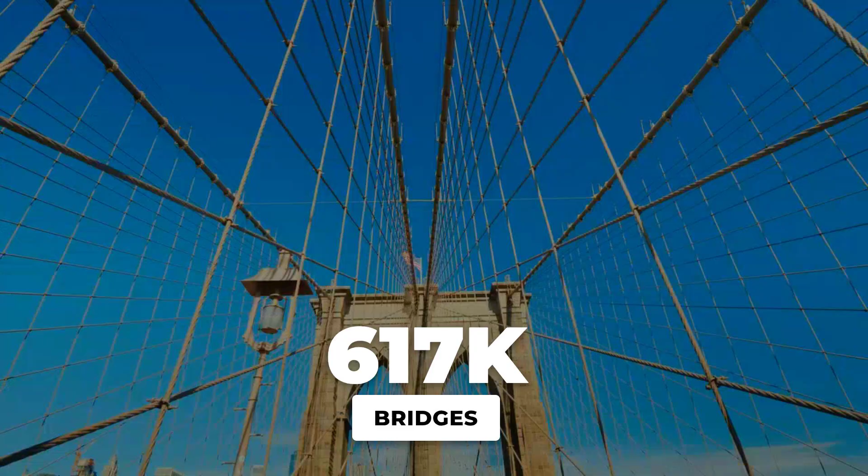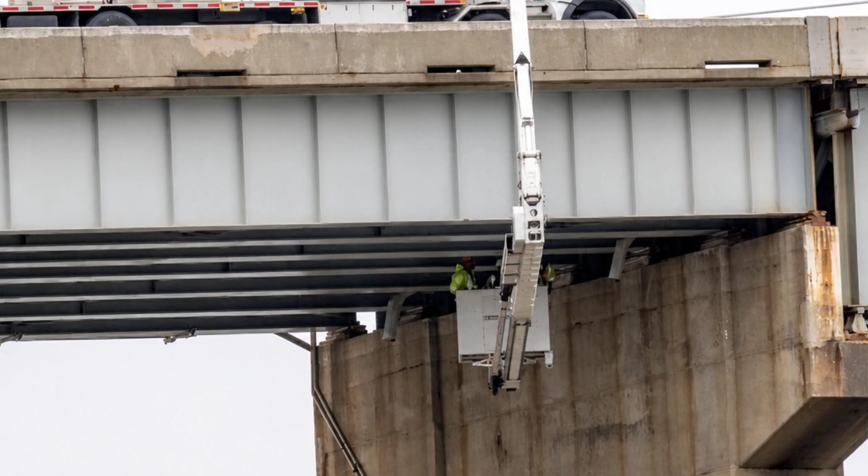Every day, 178 million trips cross bridges the federal government classifies as structurally deficient, not sound enough to pass, yet still open to full traffic. The American Society of Civil Engineers scored the nation's bridges a D+, a grade that has barely moved in years. Behind it, 617,000 aging structures, a repair backlog exceeding $100 billion, and a crisis hiding behind every American commute. The distance between what engineers know about these bridges and what you've ever been told is where this story begins.

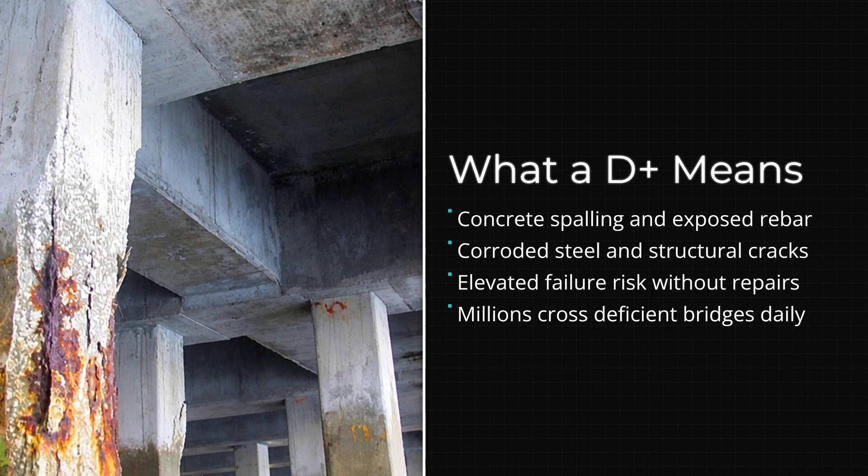Every 4 years, the American Society of Civil Engineers releases a National Infrastructure Report Card. This system translates thousands of pages of highly technical data into a single, understandable grade for taxpayers and policymakers. Since 2017, America's bridges have held a D+ grade. A D+ grade indicates that a significant portion of these structures are in poor condition, showing advanced deterioration and operating with a heightened risk of failure.

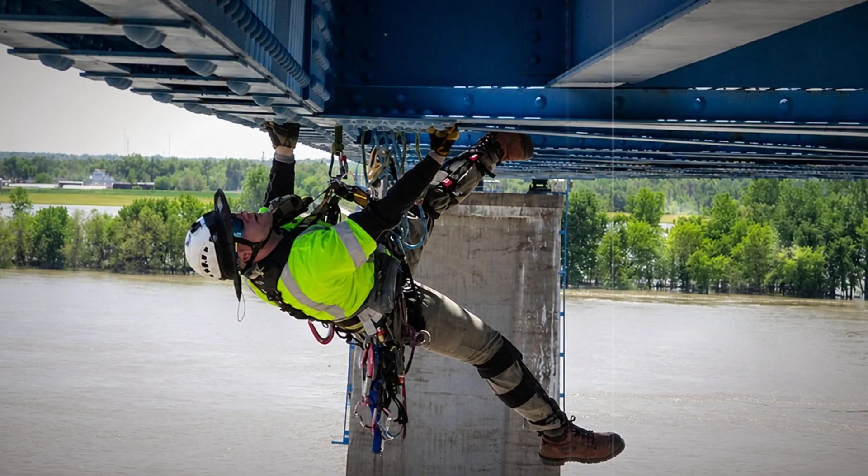When the Society issued its report card, other public systems showed progress. Public transit, drinking water, and energy systems clawed their way upward, lifting the nation's overall infrastructure grade to a C- in 2021. Yet, the grade for bridges remained completely stagnant. They did not budge from the D range. This stubborn score shows that while other public assets slowly recover, the concrete and steel carrying millions of vehicles daily are left behind.

Spread across the United States is a massive network of roughly 617,000 bridges. As of 2022, federal records classified about 42,000 of these structures as structurally deficient. This designation means that at least one key load-bearing component, such as the deck or the concrete support piers underneath, has degraded to a poor state. Rather than being isolated to a few remote areas, this structural wear is distributed throughout the entire national transit system. Statistically, 1 in 3 American bridges now requires significant repair or complete replacement.

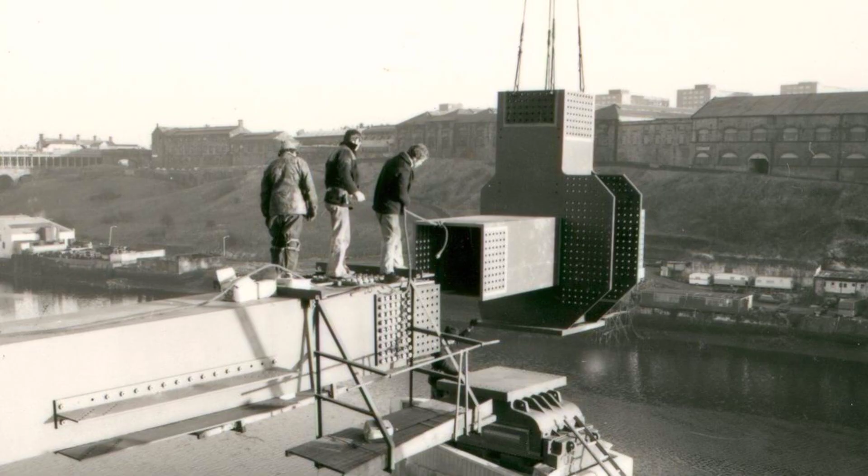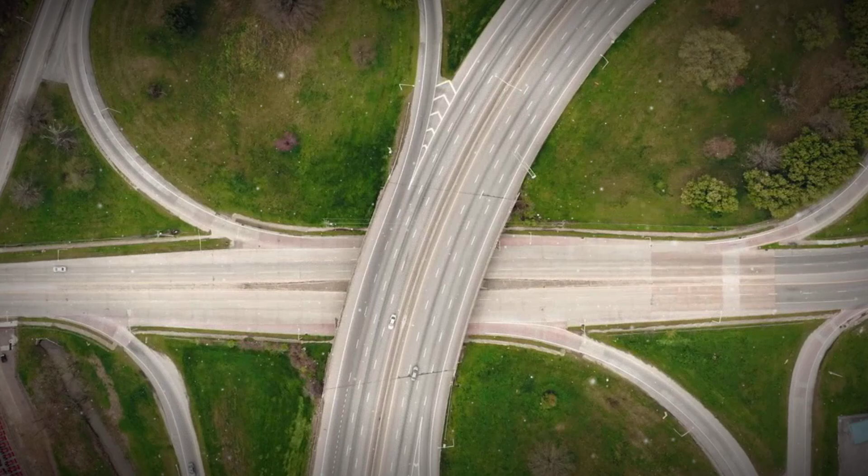Many of these spans are aging simultaneously. The average bridge in the national inventory is 44 years old, meaning a large portion of the network was built decades ago to handle much lighter traffic than it carries today. This deterioration directly affects daily life. For a parent driving children to school or a commuter heading to work, these statistics materialize as the concrete overpasses and river crossings they cross twice a day. The wear is silent, ongoing, and embedded in the daily routines of millions of people who assume the pavement beneath them is sound.

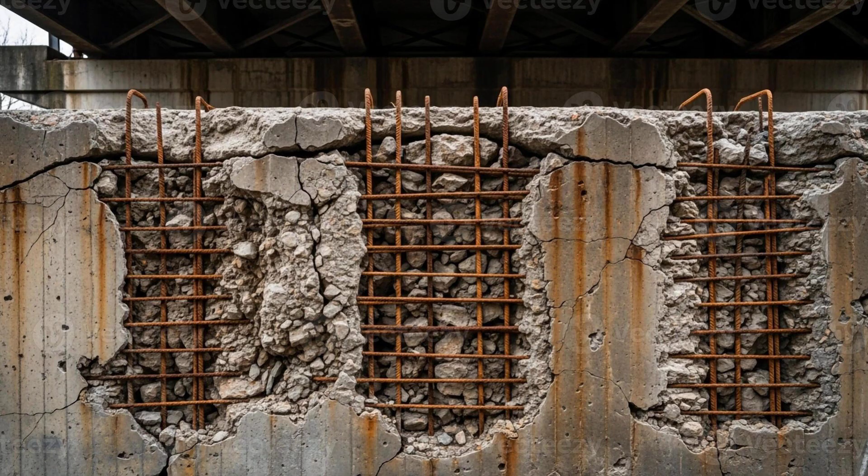To evaluate bridge safety, the Federal Highway Administration relies on a strict 0 to 9 condition scale. National standards require inspectors to assess 4 primary areas: the deck, which supports the actual roadway; the superstructure, which bears the immediate weight of the traffic; the substructure, consisting of the piers and abutments that anchor the bridge; and any culverts running underneath. If an inspector rates any single one of these major components as a 4 or lower, the entire bridge receives the federal classification of structurally deficient. A rating of 4 indicates that the component is in poor condition, showing advanced decay, cracking, or material loss.

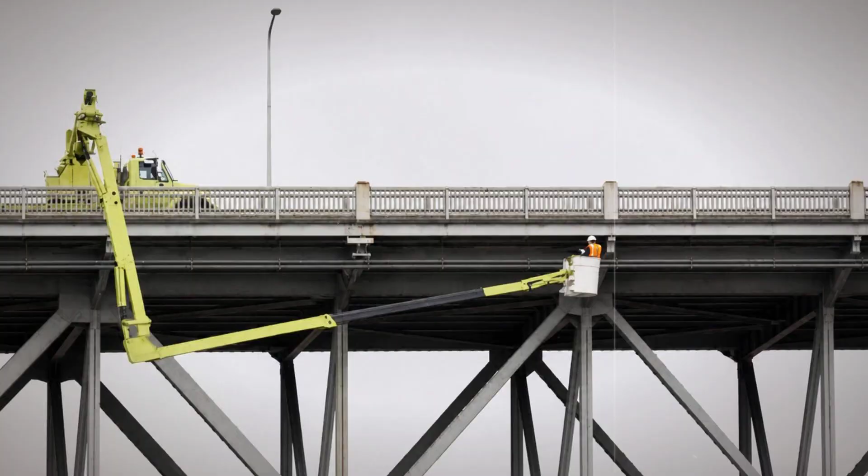This classification does not mean a bridge is in danger of immediate collapse. Instead, it serves as an early warning, indicating that an essential load-bearing element needs rehabilitation or replacement. While waiting for these repairs, federal rules allow these deficient bridges to remain legally open to full traffic. This operational status keeps the aging network integrated into daily routines. Every day in America, commuters, school buses, and commercial trucks make roughly 178 million trips across these structurally deficient bridges. These drivers move at highway speeds, completely unaware of the degraded support systems resting just feet below the pavement.

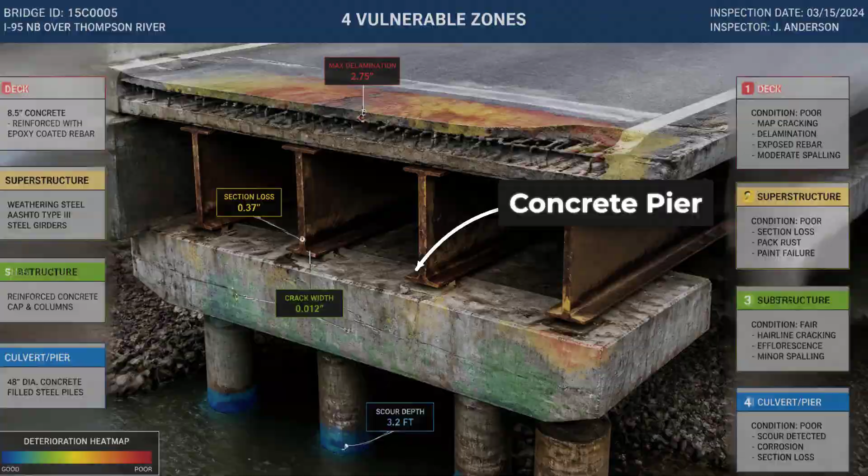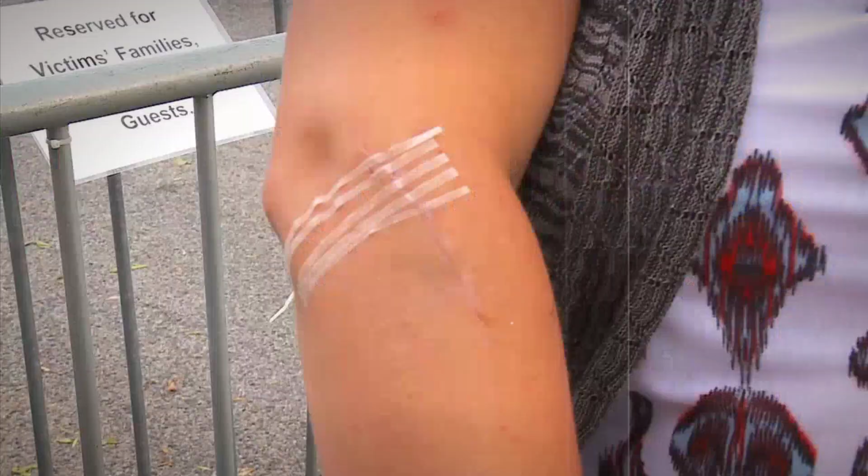On August 1st, 2007, during the evening rush hour, the 8-lane steel truss I-35W bridge in Minneapolis suddenly fractured and plunged into the Mississippi River. The disaster killed 13 people and injured 145 others. At the moment of the failure, the span was carrying part of its daily load of 140,000 vehicles, alongside heavy construction equipment parked on the deck for resurfacing work.

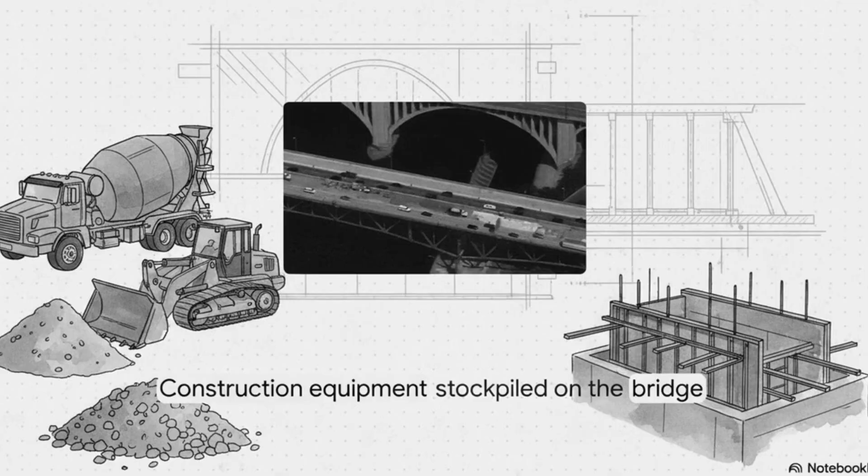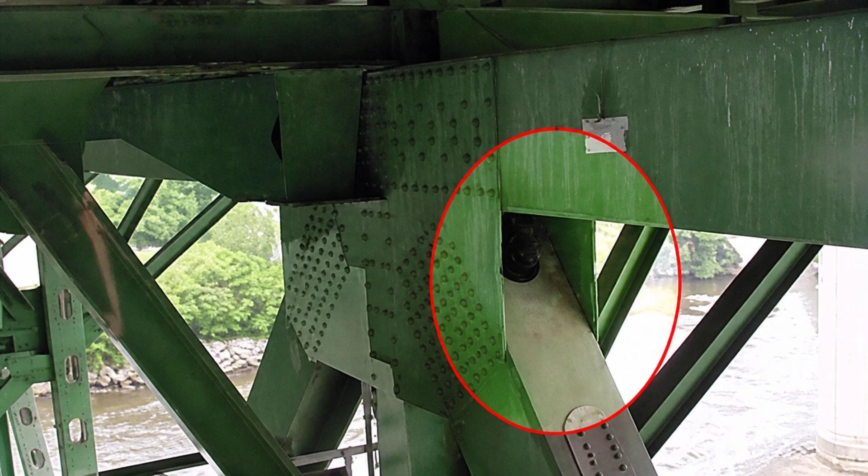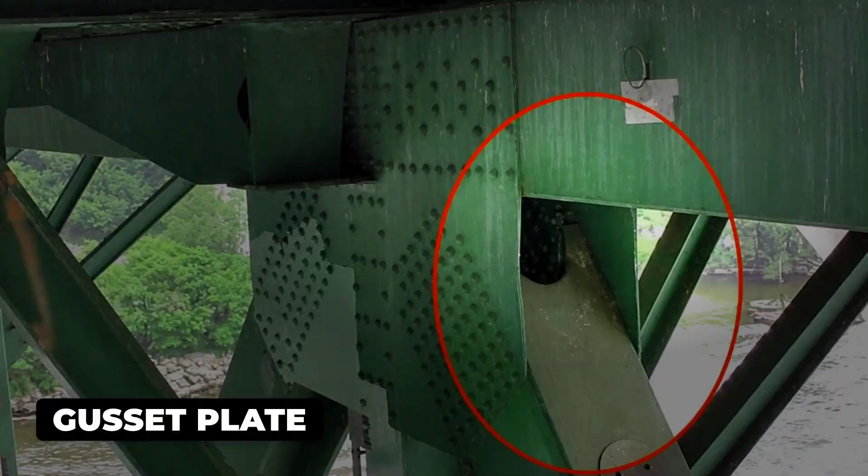For 17 years leading up to the disaster, the National Bridge Inventory had classified the I-35W bridge as structurally deficient. Its superstructure score fell to a 4 in 1990, yet the physical failure originated from an error made 40 years earlier during construction. Investigators from the National Transportation Safety Board discovered that the bridge's steel gusset plates, which joined the massive truss members together, were designed too thin. At just half the required thickness, these undersized plates from 1967 held the structure together until the cumulative weight of traffic, concrete modifications, and construction materials ultimately caused them to buckle.

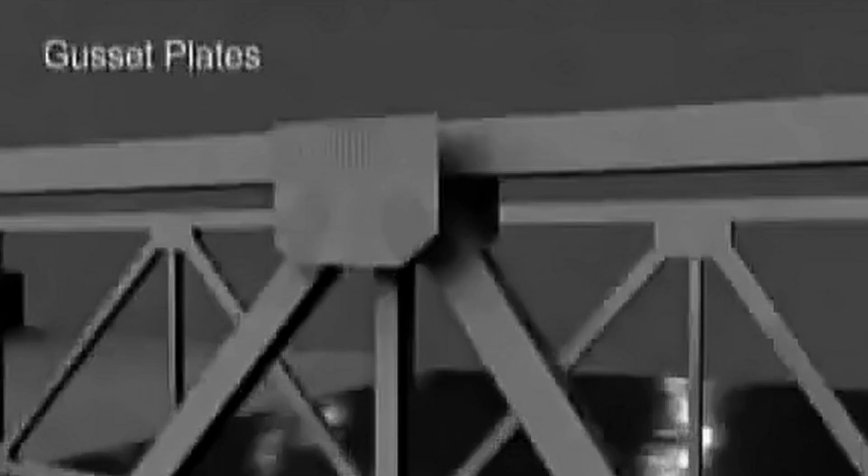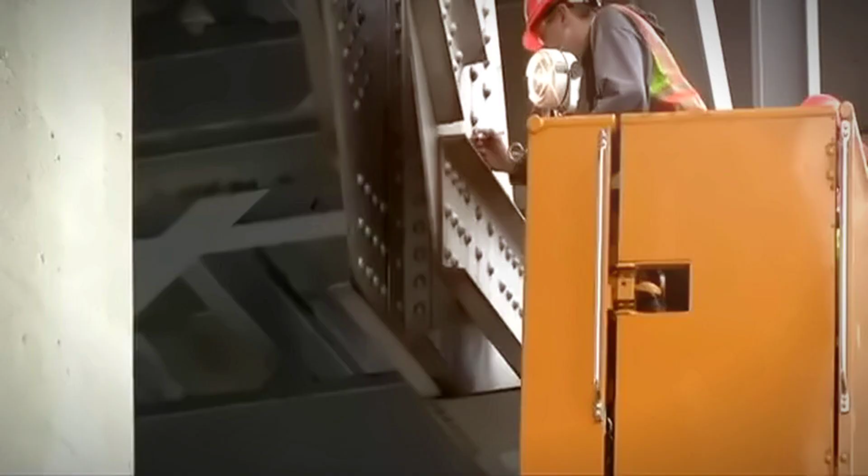The Minneapolis disaster proved that structural deficiency classifications warned of real, physical dangers. It forced the first serious nationwide bridge safety conversation in decades, forcing state and federal agencies to reevaluate how they assessed the load capacity of non-redundant steel bridges across the country.

Before dawn on March 26, 2024, a container ship lost power and struck a primary support pier of the Francis Scott Key Bridge in Baltimore. The collision triggered a catastrophic chain reaction, causing the entire continuous steel truss span to collapse into the Patapsco River within seconds. 6 construction workers who were repairing the roadway at the time were killed.

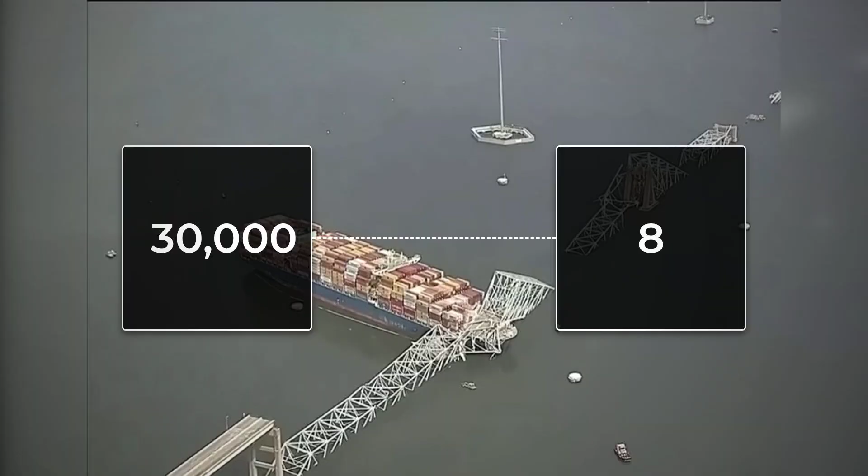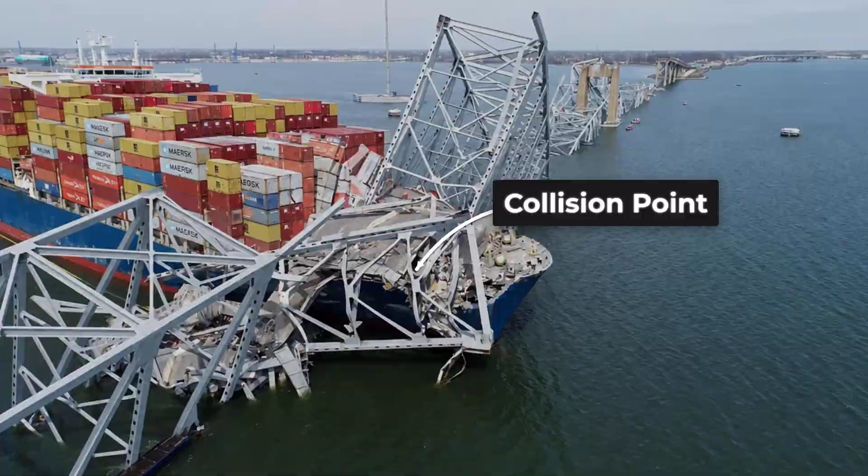The disaster instantly severed an essential freight artery in the Northeast. Prior to the collapse, the bridge carried 30,000 vehicles every day. With the crossing destroyed and the port of Baltimore blocked, regional shipping networks were thrown into chaos. Rerouting freight and commercial trucks around the harbor cost the economy an estimated $15 million per day.

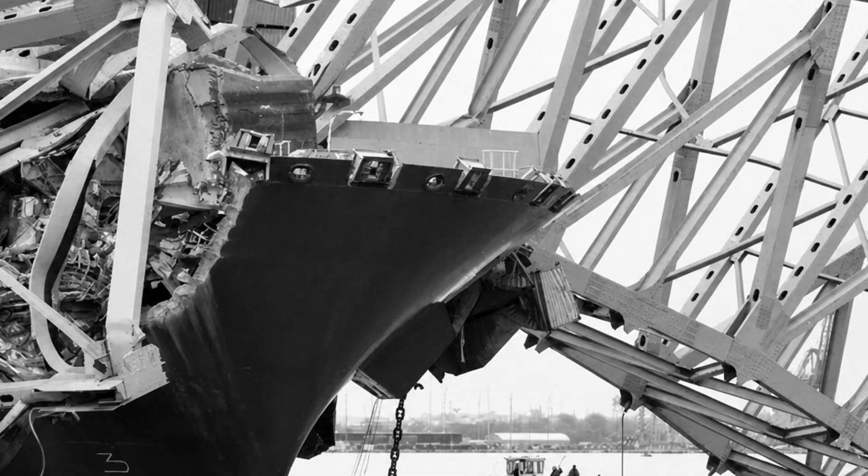While the destruction resulted from an external collision rather than structural decay, the immediate fallout demonstrated the extreme fragility of the nation's supply chains. The event temporarily reignited congressional debates on infrastructure protection, but the political momentum quickly stalled, producing no new federal legislation.

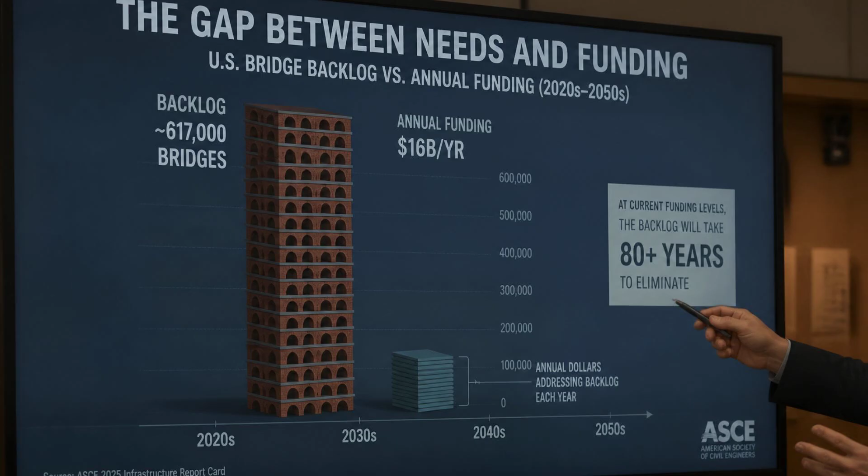The federal government estimates that clearing the backlog of structurally deficient bridges requires $125 billion. Yet normal federal funding across all programs averages only $16 billion per year. At this pace, clearing the existing backlog would take decades, even if no other bridges deteriorated in the meantime.

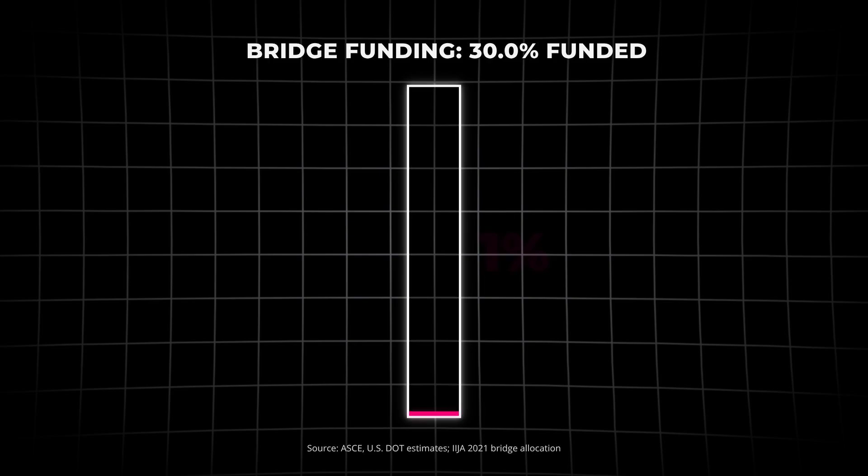To address this mismatch, the 2021 Infrastructure Investment and Jobs Act allocated $40 billion specifically for bridges over 5 years. While this represents a significant cash injection, engineers estimate it covers only 30% of the actual national need. This leaves 70% of the repair bill completely unfunded.

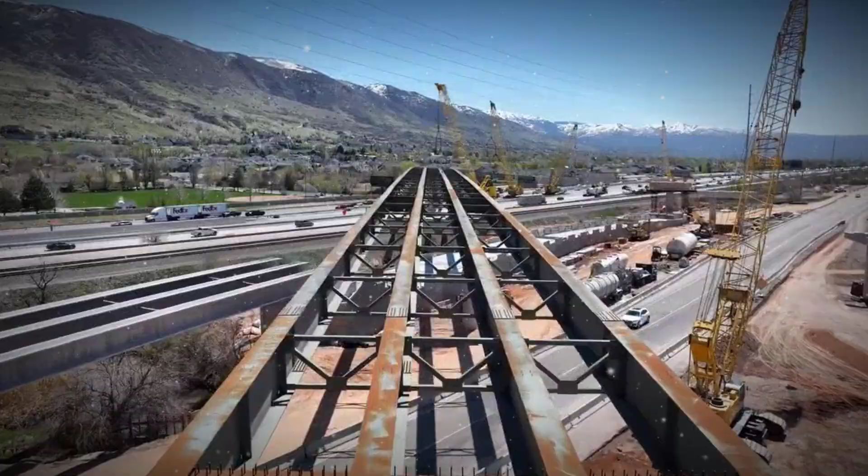For everyday drivers, this mathematical gap means that local authorities cannot fix every decaying bridge. Instead, they must prioritize high-traffic highways, leaving thousands of rural and neighborhood crossings to decay further. The funding simply does not match the physical reality of the concrete and steel.

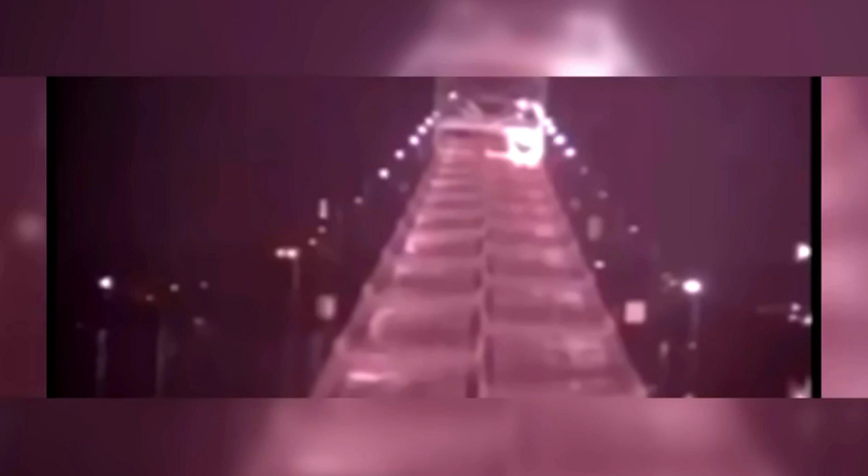When money is scarce, states are forced to defer routine maintenance, turning minor concrete cracks into major structural failures down the road. Every deferred repair increases the ultimate cost of keeping these crossings open.

The physical decay of America's bridge network is highly concentrated in specific regions. Iowa has the highest percentage of structurally deficient bridges at nearly 20%, representing over 4,400 poor crossings. By total count, Pennsylvania leads with over 3,400 deficient spans, while Rhode Island, West Virginia, and South Dakota round out the worst 5 states.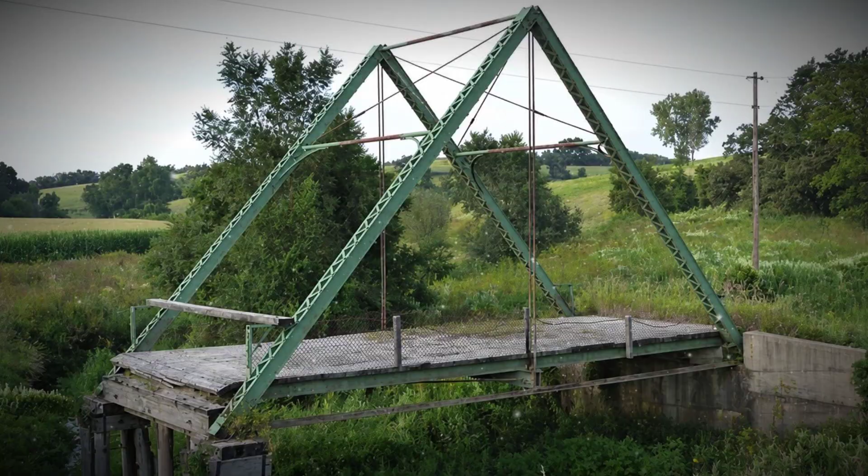While urban highway projects dominate the national news, the true weight of this funding neglect falls on rural communities. Local agricultural bridges receive far less funding and attention, yet they carry the food supply of the entire nation. For a family farmer in rural Iowa, hauling thousands of bushels of grain, a deteriorating bridge is a daily financial threat.

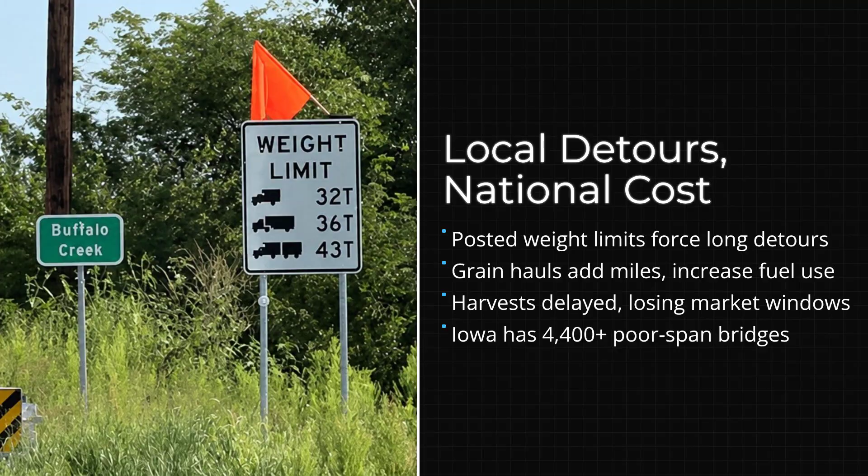When inspectors post strict weight limits on these aging crossings, heavy trucks are forced to detour miles out of their way, wasting diesel, delaying time-sensitive harvests, and driving up food transportation costs.

In Pennsylvania, a regional trucking company saw its annual operating costs spike by $1.2 million after the Route 322 bridge received a 10-ton load limit, forcing a 12% drop in cargo volume. Across the country, these weight-restricted crossings add $28 billion annually in freight transport expenses.

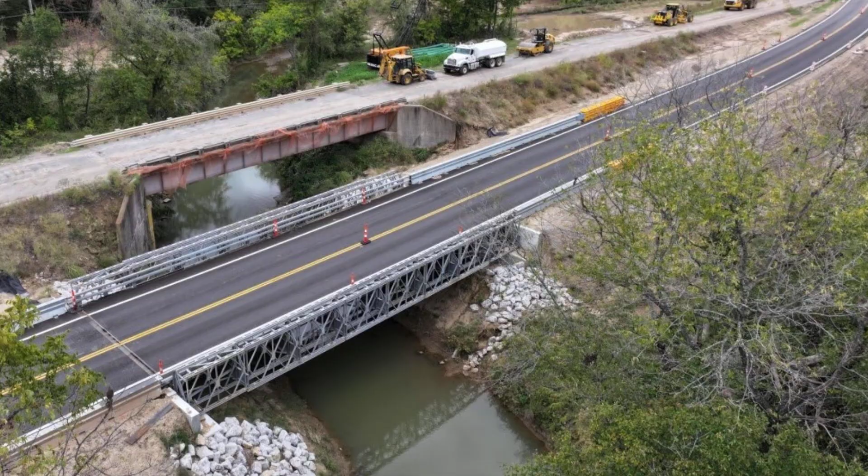For everyday motorists, the damage translates to roughly $1,000 each year in extra fuel and accelerated vehicle wear from avoiding deteriorated spans. When a bridge degrades to the point of emergency closure, the immediate financial burden shifts to county and municipal taxpayers. Local governments spend an average of $100,000 per day solely to manage these sudden detours, pay for traffic control, and reroute emergency vehicles.

This constant wear on local budgets and household expenses means the national bridge deficit is not a distant problem. It is a daily invoice already being paid by businesses, family farms, and commuters.

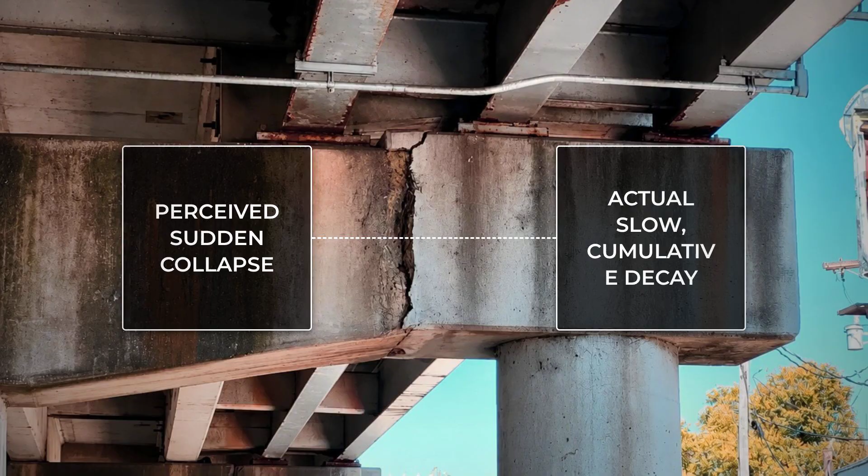While economic losses pile up on the surface, a silent physical decay unfolds beneath the asphalt. Most bridge failures develop slowly over years, rather than occurring in a single, sudden instant. They are the result of quiet, cumulative degradation that often remains completely hidden until a critical limit is reached.

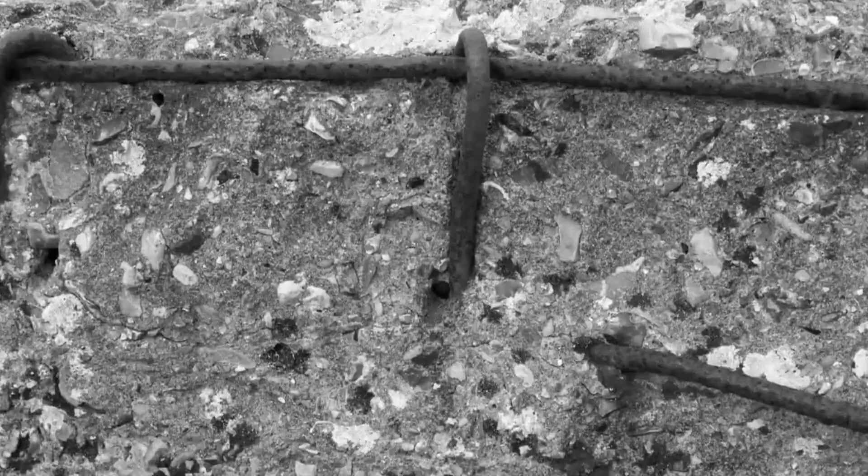Inside concrete structures, steel reinforcing bars face a destructive enemy. In northern states, winter road salt seeps through the porous concrete, accelerating the chemical corrosion of the steel underneath. As the internal rebar rusts, it expands, fracturing the surrounding concrete from the inside out until the outer layers begin to flake and fall away in a process called spalling.

But the most severe threat is completely submerged. Turbulent water flowing past a bridge pier gradually sweeps away the supporting soil and sand around the foundation. This underwater erosion, known as scour, slowly hollows out the riverbed. Scour is the leading cause of bridge collapses in the United States, triggering approximately 60% of all failures. Detecting these invisible threats falls to the bridge inspector, who must examine what the public cannot see.

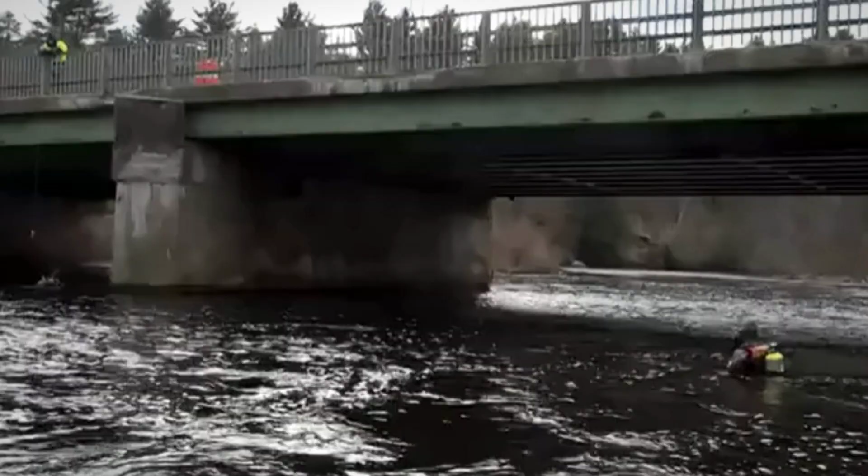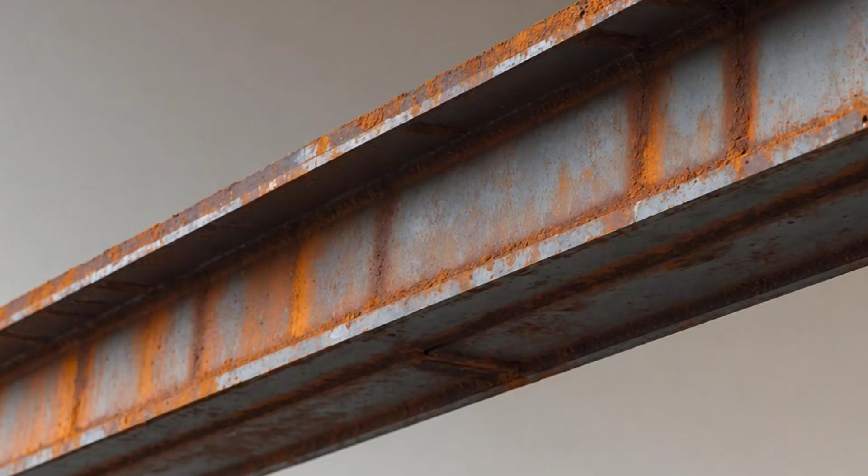Inspectors begin with basic visual assessments, walking the deck and scanning concrete columns for cracks, rust stains, or peeling paint. While effective for surface decay, this method misses everything beneath the exterior. To check foundations submerged in fast-moving rivers, specialized diving teams must descend into the water, feeling for structural damage in near-zero visibility. When the interior of steel or concrete must be checked without causing damage, technicians use non-destructive testing.

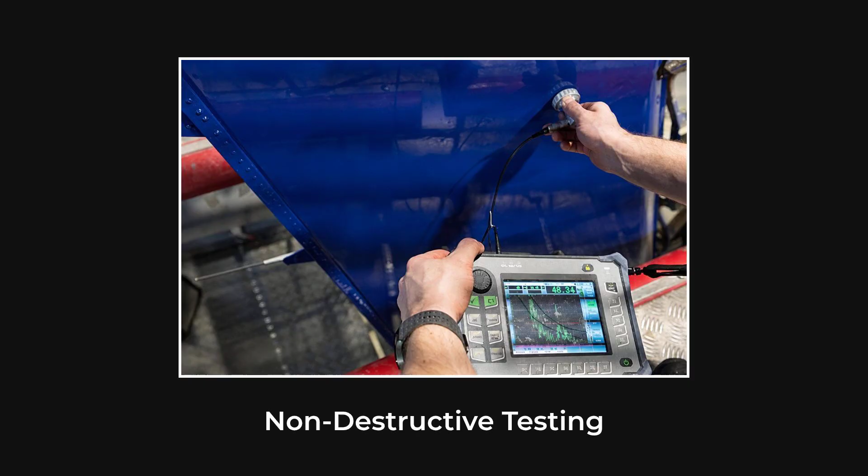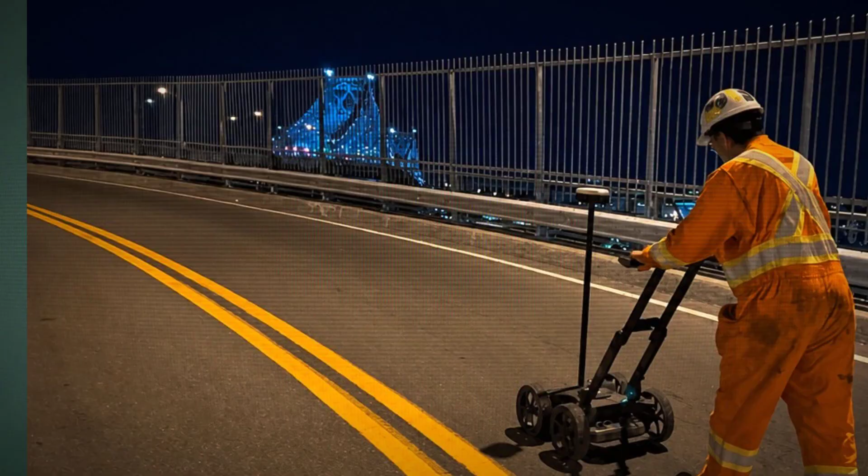Ultrasonic instruments send high-frequency sound waves through steel beams to detect hidden internal cracks before they reach the surface. Similarly, ground-penetrating radar scans the roadway, locating voids and moisture trapped deep within the concrete deck. Each tool reveals a different layer of a bridge's condition, but every method has blind spots that can leave structural decay undetected.

Federal law mandates that public bridges undergo safety inspections at least once every 24 months. Yet this regulatory safety net contains deep operational gaps. While surface-level decks are checked on schedule, complex underwater inspections of riverbed foundations are frequently deferred, sometimes for up to 6 years. This backlog is worsened by a severe, nationwide shortage of certified bridge inspectors. With limited public personnel, state agencies increasingly rely on private contractors, leading to significant variations in inspection quality from state to state. But the greatest breakdown occurs between detection and action.

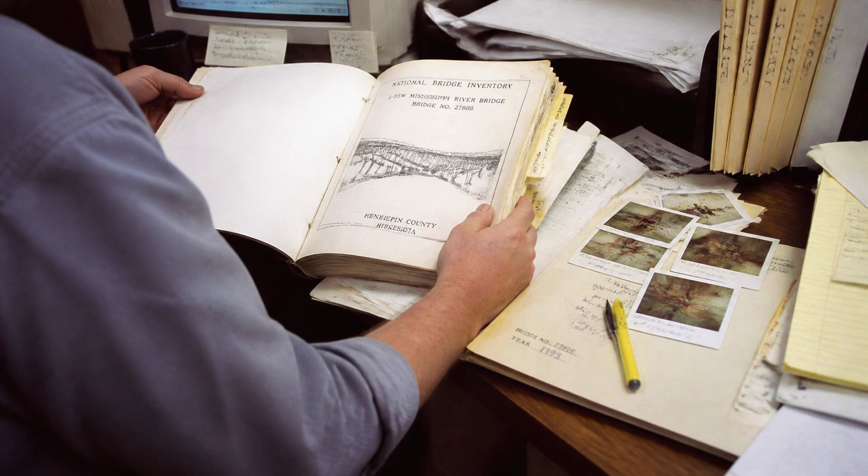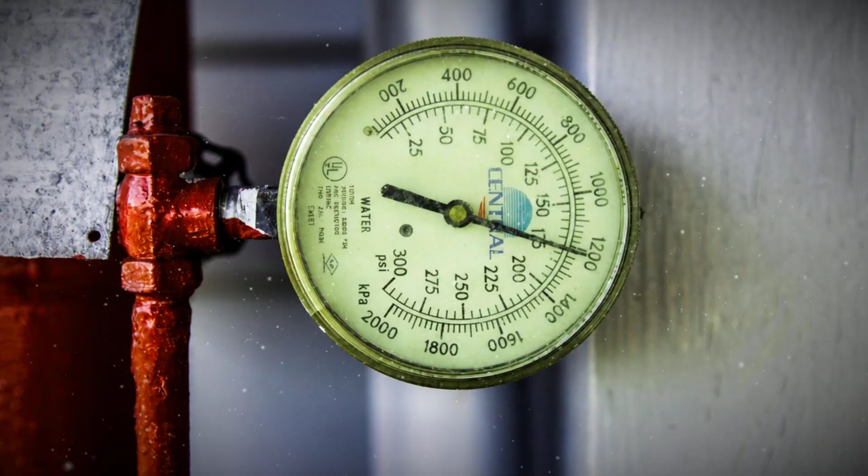The 2007 Minneapolis disaster exposed this vulnerability. For 17 years prior to the collapse, inspectors documented the structural decay of the I-35W bridge in the National Bridge Inventory. Those written warnings sat in databases, but the institutional process failed to translate paper reports into physical repairs. This gap reveals a sobering truth. Identifying a failing component does not guarantee a crew will show up to fix it.

For the millions of Americans driving to work or sending their children off on school buses, these engineering concerns exist entirely in the background. Most drivers have no idea what their daily overpasses are named, let alone how they are rated. While the federal government publishes detailed safety data, this information remains buried in complex databases that require specialized knowledge to decode. There is no simple, searchable national database where a commuter can type in an address to verify if a local river crossing is sound.

Instead, the national D+ grade is experienced in complete anonymity. It is the familiar overpass overhead and the neighborhood bridge crossed twice a day, trusted implicitly, even as the steel beneath the asphalt quietly degrades out of sight.

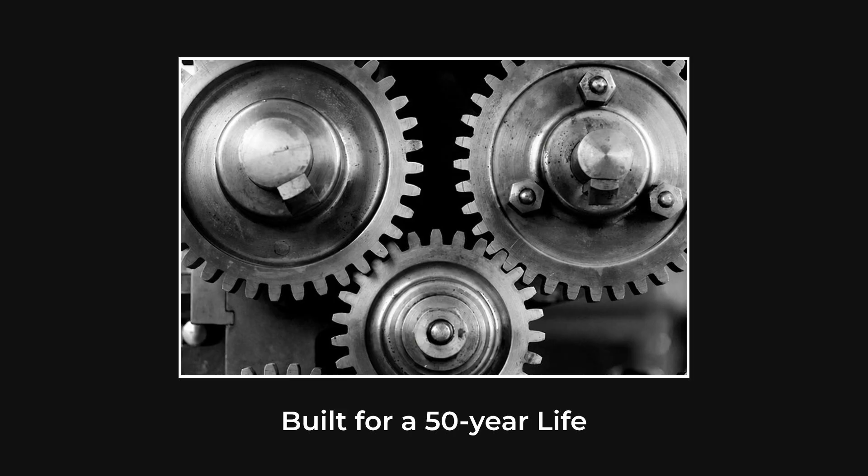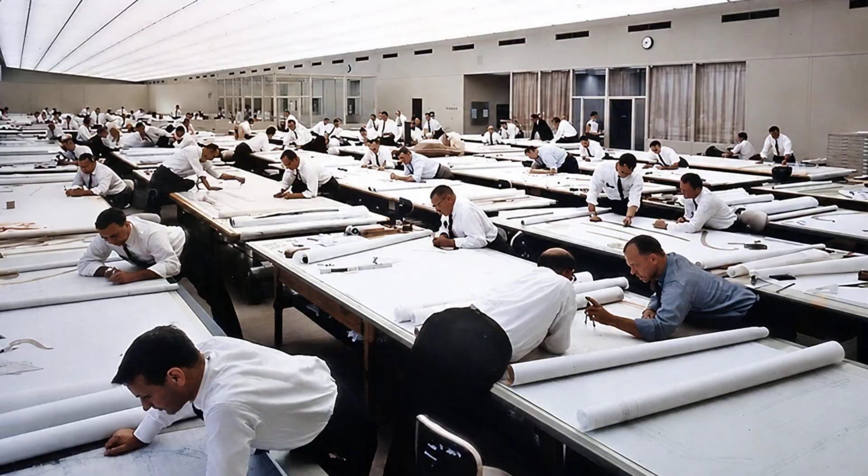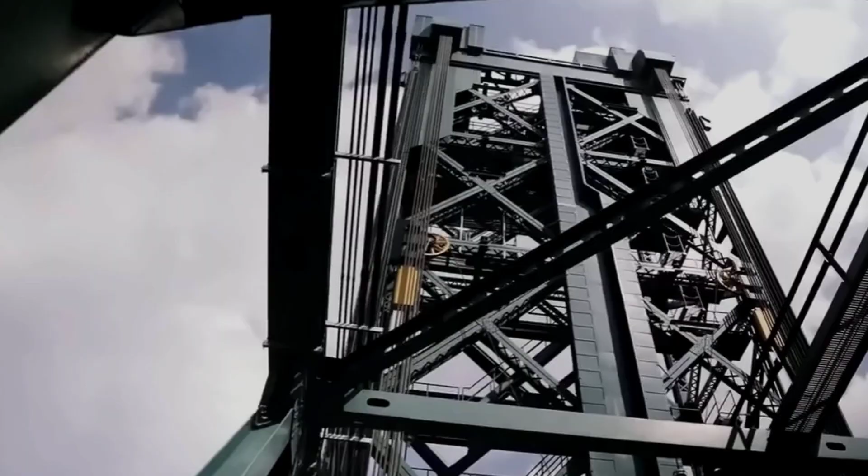Much of this vulnerability is the predictable result of a ticking clock. Between the 1950s and the 1970s, America built the majority of its modern bridge network in a massive burst of post-war construction. Engineers designed these structures with an expected 50-year lifespan. Today, that generation of infrastructure has quietly expired. The average bridge now operates decades past its intended engineering limit, while the oldest structures exceed their design lives by nearly 40 years.

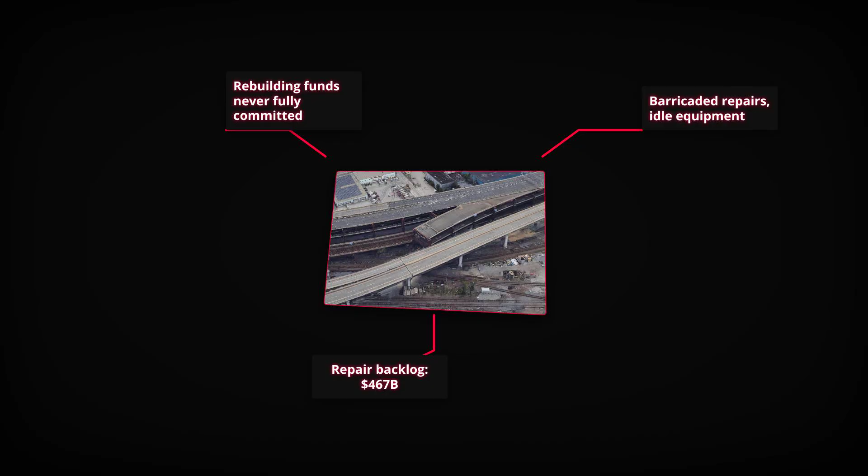While federal programs and state matching funds exist in principle, the capital required to systematically rebuild this network has never been fully committed in practice. The physical reality of concrete and steel remains unchanged. It leaves the country with a fundamental, unresolved choice: whether to invest and rebuild before the next collapse, or continue to pay the price only after a disaster forces our hand.

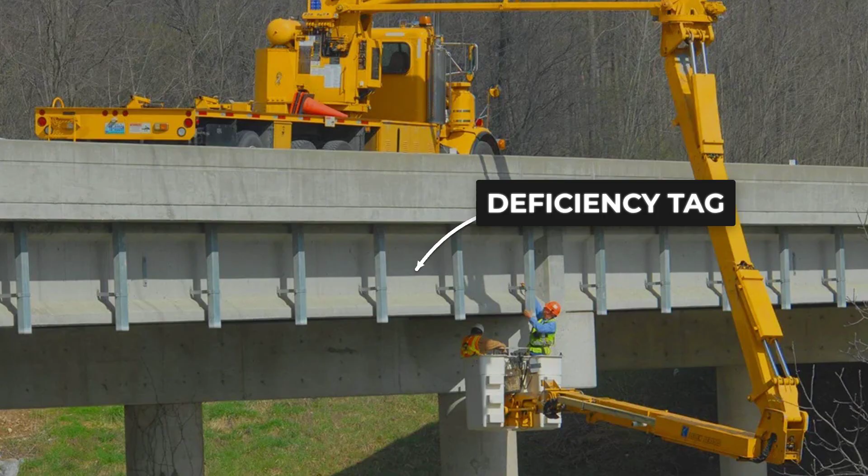Every journey across an aging span is a silent negotiation with time. A structurally deficient label isn't an immediate threat, but a severe warning. We can invest to secure these crossings today, or wait for the next disaster to force our hand. The cost of neglect always exceeds the price of repair.